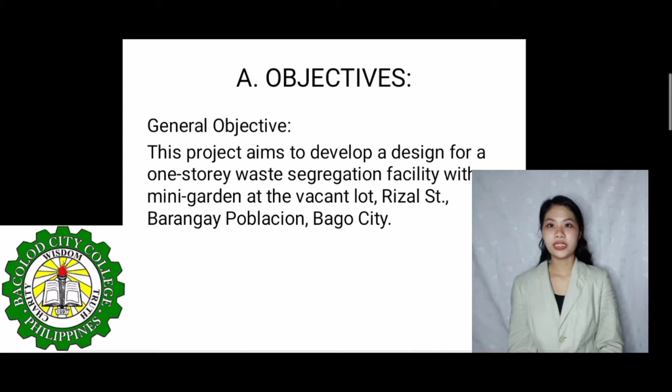As for the objectives, our general objective is that this project aims to develop a design for a one-story waste segregation facility with a mini garden at the vacant lot of Rizal Street, Barangay Poblacion, Bago City. Specifically, this project aims to develop a design of a waste segregation facility with the following features.

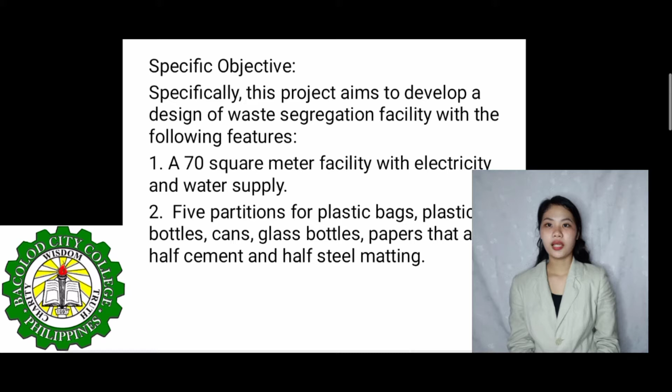First, this facility is 70 square meters with electricity and water supply. Second, it has 5 partitions for plastic bags, plastic bottles, cans, glass bottles, and papers, which are half cement and half steel matting.

Third, a compost pit outside the facility, with a top length of 2 meters and a depth of 0.5 meter, and a bottom length of 1.5 meters. Fourth, we have one restroom dimensioned at 2 meters by 1.5 meters.

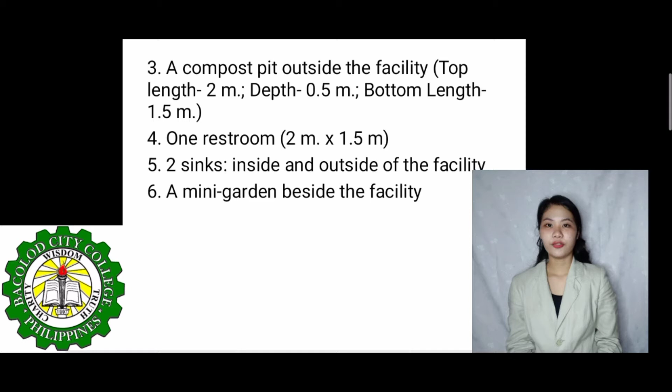Fifth, this facility also has 2 sinks located inside and outside of the facility. And sixth, a mini garden beside the facility.

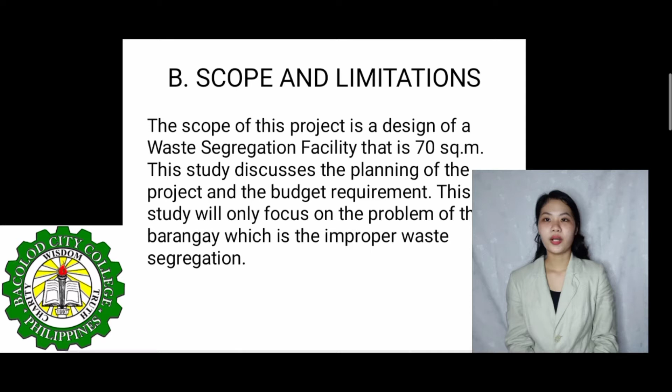Scope and limitations. The scope of this project is the design of a waste segregation facility that is 70 square meters. This study discusses the planning of the project and the budget requirement. It will only focus on the problem of the barangay, which is improper waste segregation, and aims to find a solution for that problem, which is the waste segregation facility.

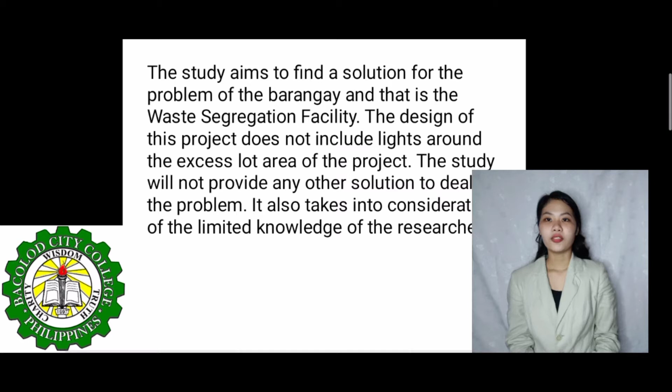The design of this project does not include the lighting around the excess lot of the project. This study will not provide any other solution to deal with the problem. It also takes into consideration the limited knowledge of the researchers.

The significance of the study. This project aims to benefit, first, our Department of Environment and Natural Resources; second, the barangay officials; third, residents of Barangay Poblacion; and fourth, the researchers.

This study will benefit the Department of Environment and Natural Resources by promoting the proper way of segregation and the 3 R's—reduce, reuse, and recycle—advocacy in the barangay that could contribute to preserving our environment.

Second, the barangay officials of Barangay Poblacion. This project will help the barangay officials in their Clean and Green program.

Third, the residents of Barangay Poblacion. This project will benefit them by providing a place for segregation of waste, which could help in the cleanliness of the community, along with a mini garden to get some vegetables and fruits.

Fourth, the researchers. This study would help the researchers have a reference for future related research studies.

As for the concept of the study, our project is the waste segregation facility that promotes waste management. Under the waste segregation facility, its function is to promote proper waste disposal and segregation. To classify our waste, we have biodegradable and non-biodegradable.

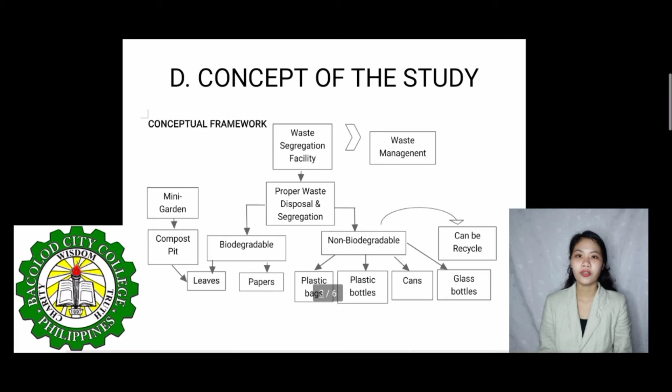Biodegradable waste are leaves and papers, which can be moved into a compost pit and used as fertilizer for our mini garden. On the non-biodegradable side, we have plastic bags, plastic bottles, cans, and glass bottles, which can also be recyclable.

As for the construction flow of this project, we have a plan that includes our floor plan, foundation plan, footing and column details, beam details, wall details, roof framing plan and its trusses, and its electrical and plumbing layout.

Each plan has its estimates regarding the cost of the materials and cost of the labor, and after the estimates we can do our financing.

Under the plans, we have here the permits and insurance. It is important for the researcher to have permits and insurance while doing this project.

For the site preparation, that included our site clearing, site surveying, soil testing, site investigation, and our layout design.

We can proceed to the foundation. After foundation, we can now frame our windows and doors, then the roof framing, then our plumbing plan, electrical plan, and we can finish our project.

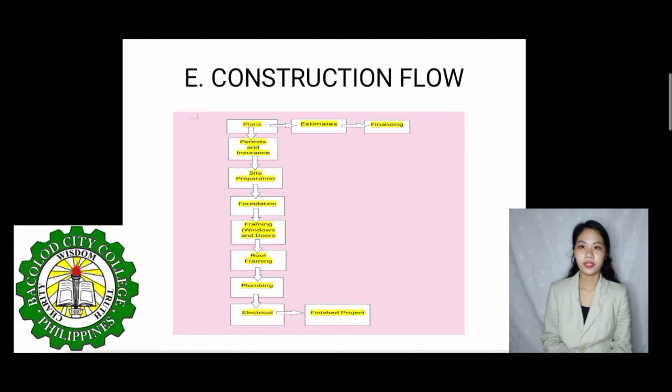In the floor plan, we have one comfort room and a sink inside the facility, 5 partitions for our waste segregation. These are plastic bags, plastic bottles, glass bottles, cans, and papers.

On the entrance, the space is for the collecting and segregating area. There is also a sink on the outside of the facility.

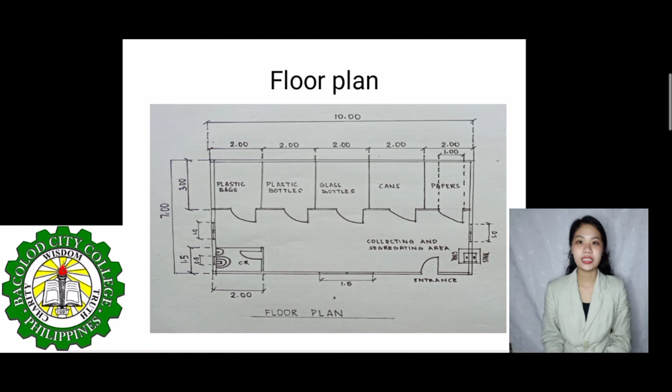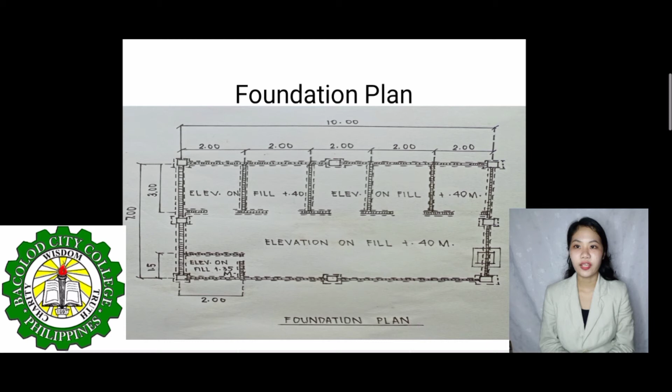For the foundation plan, the researcher indicated that the elevation of fill must be 0.40 meters, and the elevation of the comfort room is 0.35 meters. This facility has 8 columns.

Column details: we have 0.30 and 0.10 footing height. It has 5 pieces of 10 mm diameter stirrup at 5 cm spacing, 5 pieces of 10 mm diameter stirrup at 7 cm spacing, and 10 mm diameter stirrup at 0.20 meter spacing.

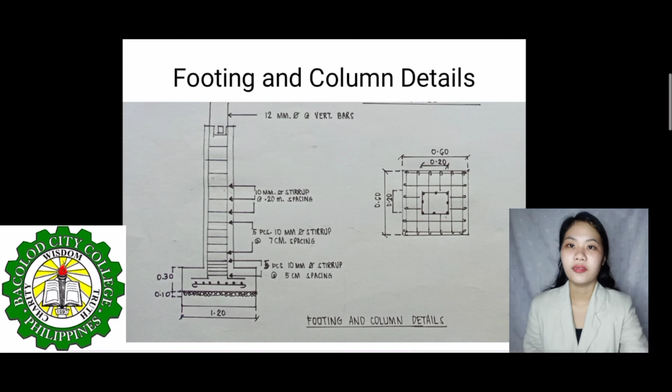Beam details: we can use a deformed bar of 10 mm diameter. For wall details for partition, it has a length of 3 meters.

It has a height of 2.7 meters. The measurement of cement from the flooring is 1.35 meters, and it is laid on top by a steel matting of 1.35 meters.

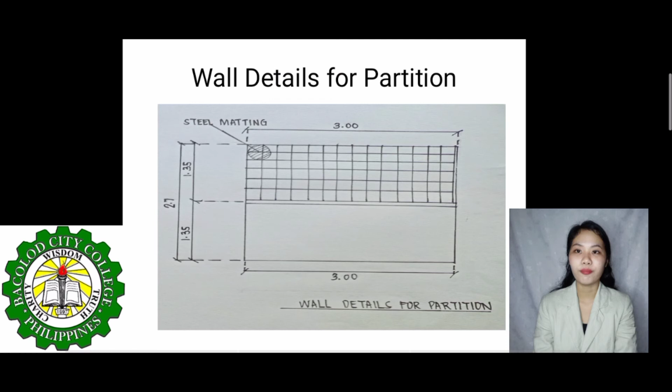Next we have our roof framing and truss detail. For our roof framing plan, we can use a galvanized 2x4 inch C purlin at 0.40 mm gauge. Length is 9 meters, width is 12 meters.

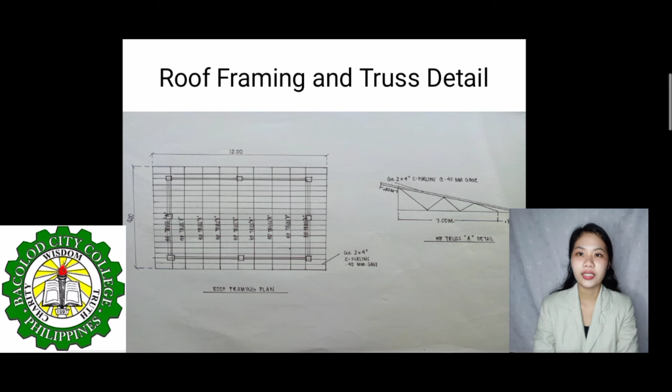For our truss A detail, we also use a galvanized 2x4 inch C purlin at 0.40 mm gauge.

For our sanitary layout, this facility has only one comfort room, one water closet, one lavatory, one clean out, and one floor drain. We use a 50 mm diameter PVC orange pipe and a 100 mm diameter PVC orange pipe going to our septic tank.

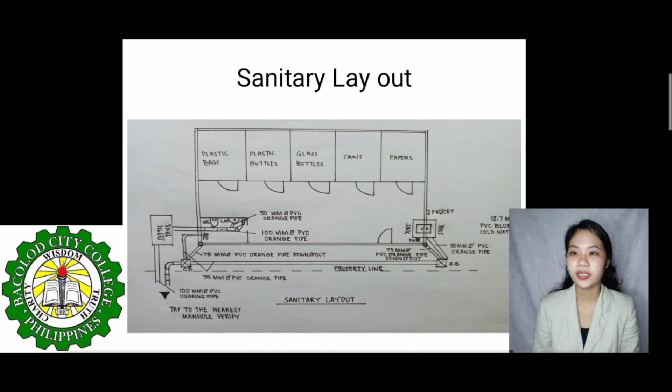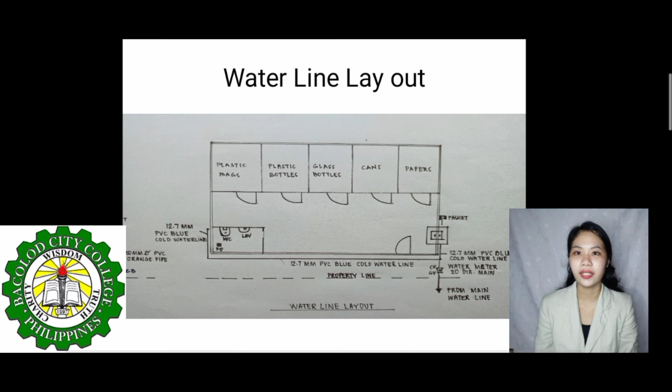For the water line layout of this facility, we can use a 12.7 mm PVC blue cold water line. We also have here a 20 mm diameter main water meter.

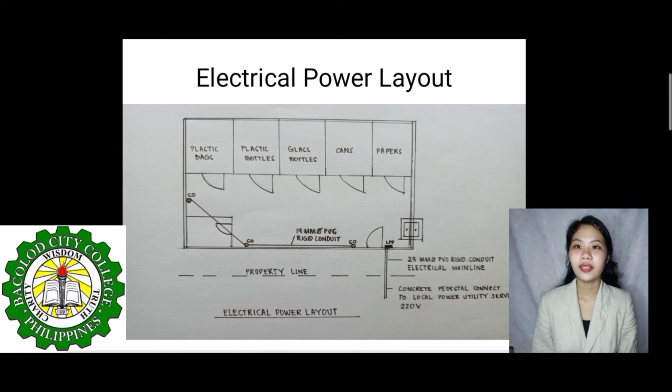For electrical power layout, we have 3 convenience outlets. For the electrical lighting layout, we have 8 lighting bulbs which have 50 watts.

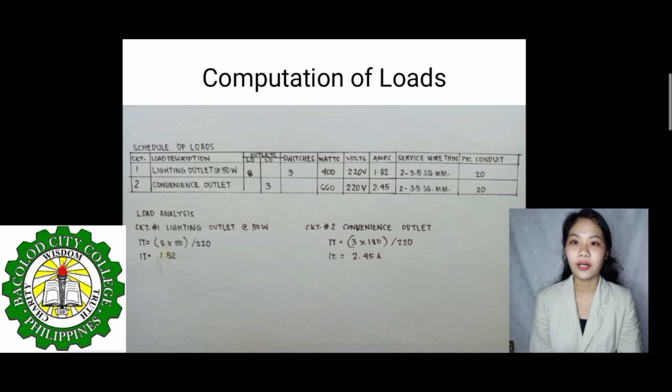For the computation of loads, our circuit number 1 lighting outlet at 50 watts has a total of 1.82 ampere, and our circuit number 2, the convenience outlet, has a total of 2.45 ampere for development cost.

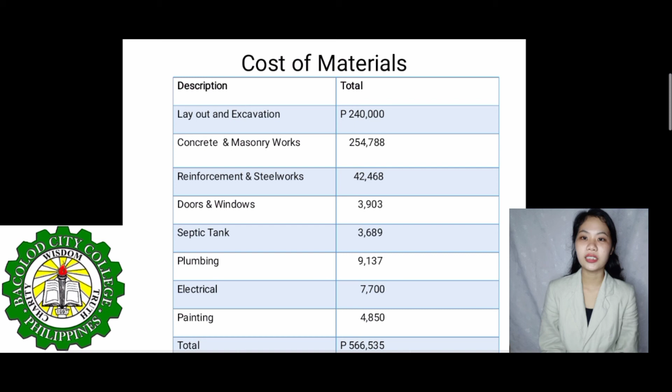For our total cost of materials we have 566,535. Cost of labor, we need 309,400. Summary of our development cost, adding the cost of materials and cost of labor, gives us a total of

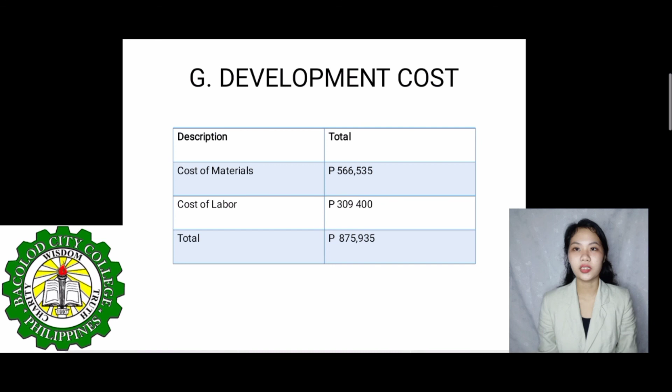875,935 pesos. So for the summary of this waste segregation facility, the presentation is 70 square meters located in Rizal Street, Barangay Poblacion.

It has 5 partitions good for segregating the waste of the community, 1 comfort room, and 2 sinks inside and outside.

This would also help contribute to our barangay having a greener place and a clean environment, and also the collected materials such as recyclable materials which are non-biodegradable can be used for future project purposes. It can be recovered, and so the waste being delivered to the landfill will be reduced.

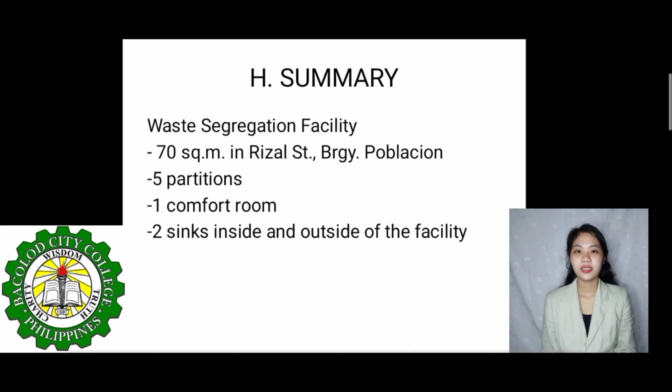And for the mini garden, the residents can get vegetables and fruit.

Again, for the summary of our development cost, which gives us a total of 875,935. This ends my presentation regarding my waste segregation facility.